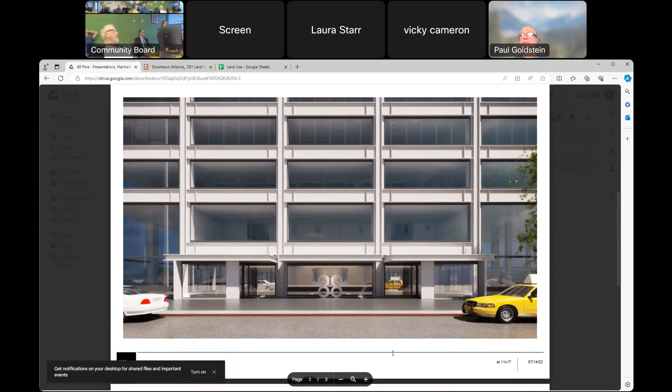I want to show you this that you asked for. So this is the existing condition outside, and then the proposed, with the two vestibules and the sliding doors. It may be helpful to talk through the plans for a moment—if you could switch to the file called existing. You want me to go through the third view? You can, if you like, but then let's go back to that too.

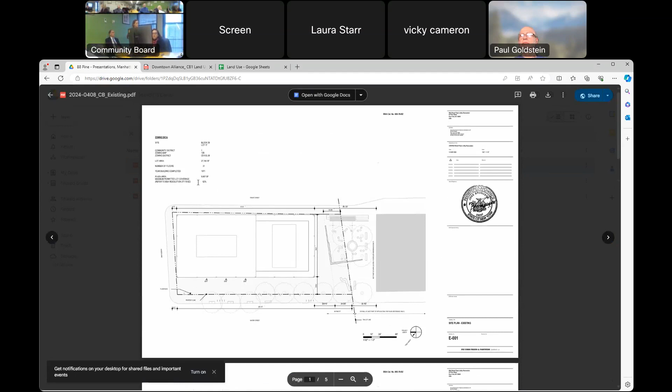Just for context, as you're pulling that up—I've worked in this building for 20 years. I've been with Pei Cobb Freed & Partners, and I just joined the partnership 9 months ago. This building's important to me professionally, but also personally, because I do work here.

So here's what's going on. This is the existing condition. You can see—next page, please. I'm sorry, one more after that.

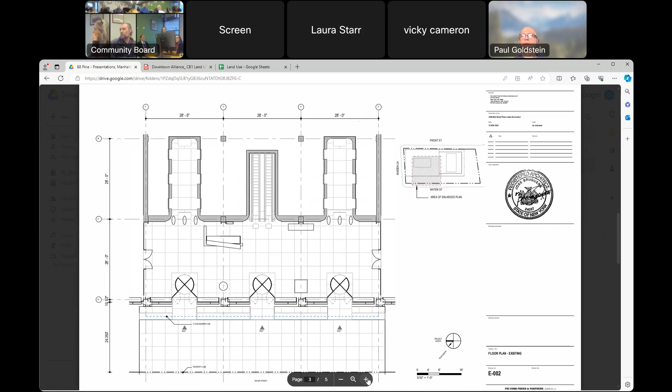So here's the existing lobby plan. You see there are 3 revolving doors and then the swinging doors, which don't have the required ADA compliant flat surface on the push and pull side of the door. Also, just as a tidbit, those 3 doors were there because, as you see in the center of the plan, there's an escalator. This was initially supposed to be an entry to the subway, which never got built. So that's part of why in 1971, before I was born, it was decided to put that many doors in.

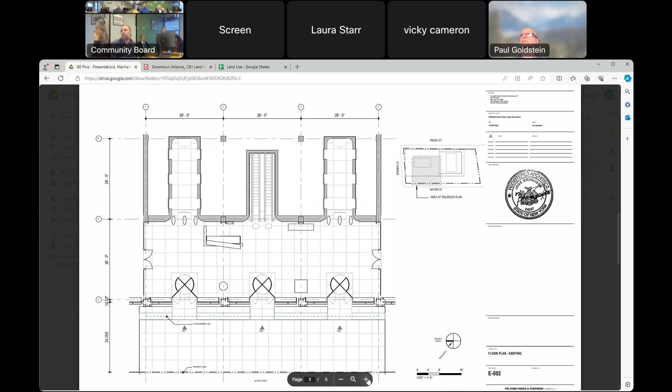So now if we switch to the proposed plan, please. Here we're adding these vestibules. So there are 2 things happening here. One is compliance with the 2020 New York City Energy Code.

This will be the 4th storefront renovation I'm doing in Manhattan under that new code. What happens is that code specifically eliminated the ability to provide swing doors adjacent to a revolver that don't have a vestibule—meaning you have to be able to open and close one door before you open and close the next. So it kind of took away that loophole in the energy code.

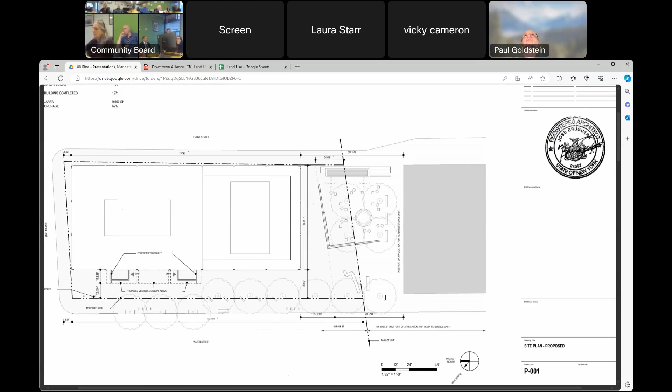So our solution here is actually to provide the sliding doors in a vestibule configuration, so there's one way of getting in regardless of your accessibility needs. This is what you're seeing in the plan. You can just go to the enlarged plan to see that. So that'll be ADA compliant and also energy code compliant, including all the bells and whistles for the glass thermal performance.

Of course, it's only a renovation of these couple of bays, but we are going to be compliant with that, and that's consistent with how everything's... I'm just slowly sliding through so the architects in the room can see.

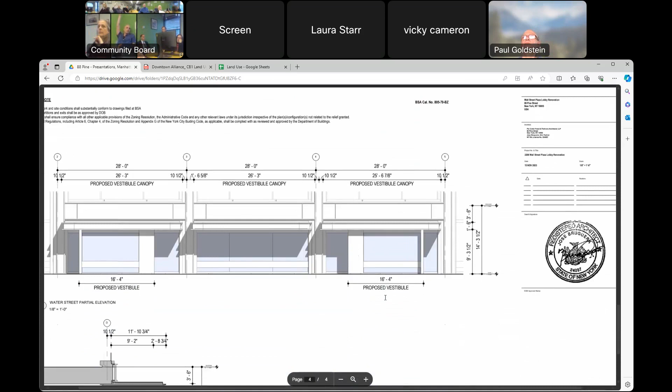Jason has his hand up. I am a big fan of Pei and this building—I live right by it. It's a shame it's not covered by some sort of preservation or whatever. I'm just gonna lead with this, might not be the same feeling for everybody, but I think it's as modest as you can make it, and I think it might be getting caught up in a lot of the Water Street text amendment vibes. Maybe, hopefully, we can find a solution if you really do need to provide access to this building, and that this is the only way.

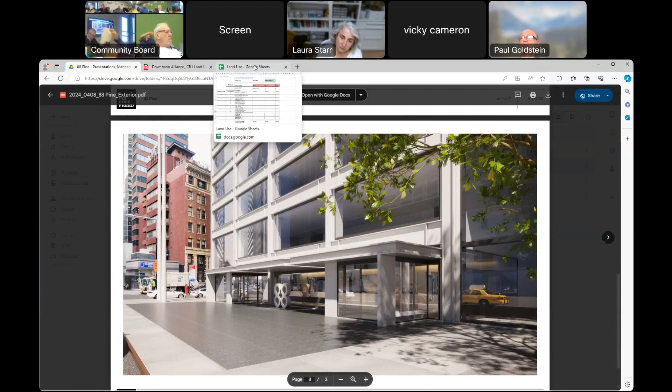Thanks, Jason. Alice, then Gerald, then Laura—I see your hand up online. Is the current existing condition illegal in New York City at this point for those types of doors, those 3 doors? Are they—illegal is not the correct word, non-compliant. Whereas it was legal when it was constructed, it remains legal to this day, but could not be constructed in this manner. Right, but it is legal today. So you can use those doors today.

So I just think that—the thing about this, I know this came up last time—it's understandable why this plan is being presented to us. You're taking over, I think, close to 400 square feet of city sidewalk. No, it's 12 by 16, that's close to—what is that—192 square feet times two, with two vestibules.

So I'm not sure how you get 12 by 16, it's 192, right? Times two is 384. So you're closer to 400 square feet of city sidewalk.

And I know that as of right, I guess, you're allowed to take that, we learned last time. You're creating basically a new advertising platform for 88. This comes out 12 feet from the building. That was city sidewalk, public sidewalk, that you're taking to put in the new 88, and I thought there was a sculpture or something involved.

And that's all, I guess, well and good for some people. It certainly isn't for me personally, and I agree with Jason on the integrity of the original building. But what I remember asking last time was about the space just to the north and south of you, that wonderful additional space that's part of your privately owned public space, which is not in great shape and doesn't have access from the building.

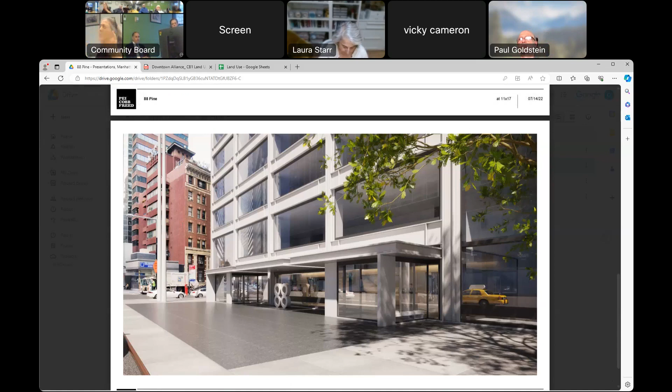I appreciate that, but if you're going to take 385 square feet of public space, you must give something back, and I'd maintain that an easy give-back would be to maintain and make that existing, very beautiful POPS into something the building benefits from. It would absolutely put it on the map. I don't understand why developers don't see that.

We will both go back to the client and tell them. Underline it. Yes, thank you. For sure. Okay, good. Thank you.

Definitely, though I will say, if we do make an entrance into the POPS, we'd have to take more space away for another vestibule. It's a design problem.

My point is that taking away 400 square feet of public space from the front of the building—I'm not saying to enter from the side, I'm saying make what you have on the side better, whether you... No argument there.

Okay, yes, it should be—if he's going to spend the money doing this, he should spend the money. And we shouldn't give it to you until you do that.

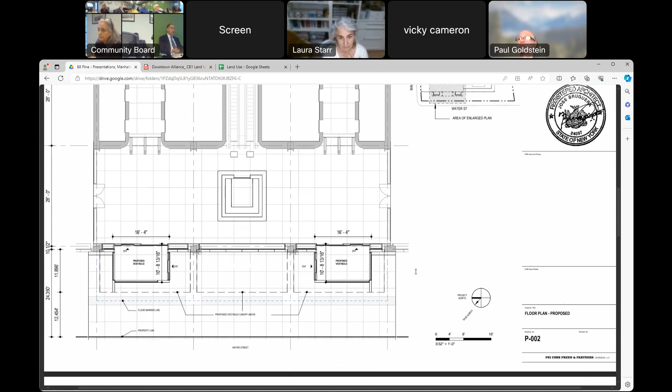This is not income-producing space. It's not going to increase the value since every tenant has to pay for the space. You pay only for your floor, including potential hallways - you don't pay for the lobby. So I don't see any economic benefit to having more wander space in the interior area.

Was there no way of bumping these vestibules on the inside of the lobby? We did study that - it was really a pinch point. It's a multi-tenant lobby, so people are moving around, and these two doors on the north and south of the lobby go into tenant space, so that's where people enter their offices. I can see that the pinch point would create really bad corners.

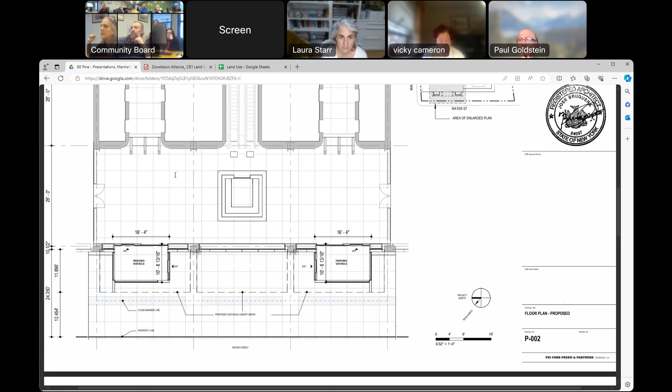What is the action here? What are we doing? It's a BSA application to amend the previously granted variance. In other words, we require more floor area - we're going back to amend the original approval to get additional floor area that exceeds the prior approved floor area.

Does it exceed the max FAR for the building - is the building overbuilt? For now, obviously yes. Well, that's a big ask - that's actually the most sacred ask of all, extra floor area. Can't you figure out how to carve it out of the thing? It's ridiculous, you can't ask for more floor area now.

What are we here for - is there a statement of findings? What is it, is it floor area, or is it just the bulk - we're out of bulk? It's out of bulk, correct. Yes, I spoke about it.

Hold on guys, so Laura, then Vicky, then Rose. I wanted to follow up on that floor area conversation, discussion.

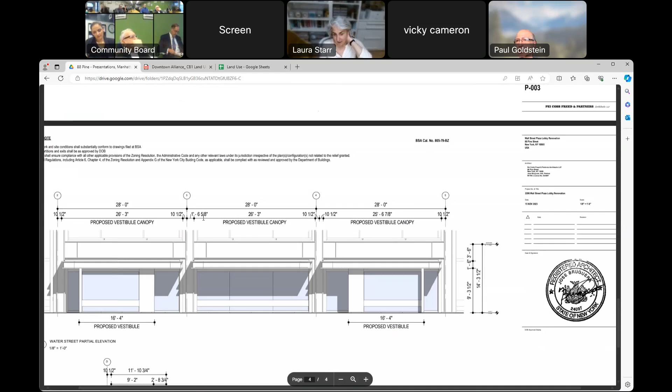Are you saying that an ADA access with the proper air seal vestibule will not fit in the footprint of the current entrances? By how many feet are we talking about? We've done other energy code compliant vestibules, and because of the dimension required between the doors, it would go further into the lobby.

Where, like how far off? I have to deal with stuff like this - you have a lot of architects in the room. What are we talking about here, how much more would you have had to intrude on the inside of the building to have this punch into the lobby instead of taking up the public space?

Can you pull up your existing condition, maybe? Well, if there's 300 and then these are 400, or rather 380 - but these are oversized, they don't need a 16-foot, 4-inch. It would be 82 feet inside that they would be taking extra, but that's not a lot.

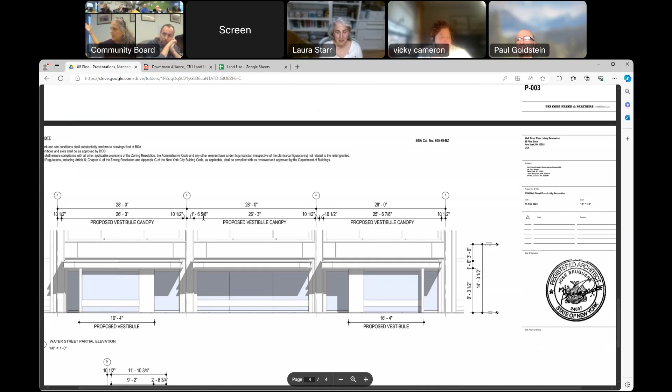Can't you swing the doors in or something? These are handicapped accessible conditions. This is what's a little misleading - those 3 doors are currently accessible, but there are in fact people who are handicapped in your building because it's a challenge to use those doors, as I've used probably those doors - yeah, it was very difficult.

Because there's not proper push-pull dimensions, so I had nowhere to stop to open the door. That's why. But okay, I guess I would like to see your studies of trying to get it to work within the current openings, even if it had to punch into the space a little more. Since you're trying to get more FAR, you should show us that.

That at least one of these doors can't be converted to what you're trying to do. That's the first thing. The second thing is, I actually find the architecture of the extension, maybe we could go back to that picture.

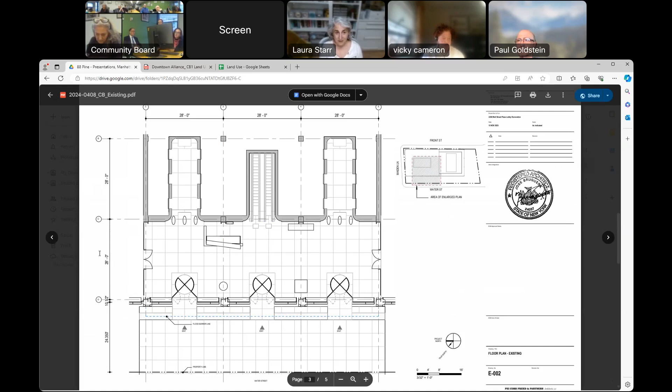I find it- I understand what you're trying to do. You're trying to use the white steel column framework of the building to punch out here. But the reason the building has those heavy frames is it's holding up a skyscraper. Here, it's just a little pavilion coming out. So it's heavy-handed for what you're trying to do.

Like I.M. Pei, what was great about his modern design there was that it was really expressing the structure that needed to be expressed to do the work it had to do. This doesn't have that work. So to me, it looks heavy and like it's kind of confusing the elegance of his building.

That's all I got. It's enough. Thank you. Thank you, Laura. Vicky, and then we'll come back into the room.

Thank you, Patrick. So Laura, well said. We are not sympathetic to this request. You got your bonus, and we don't want to give you more of our sidewalk.

In the end, it's a simple transaction. I will vote no if there are other options for ADA entrances. As an architect, design, there is always an option.

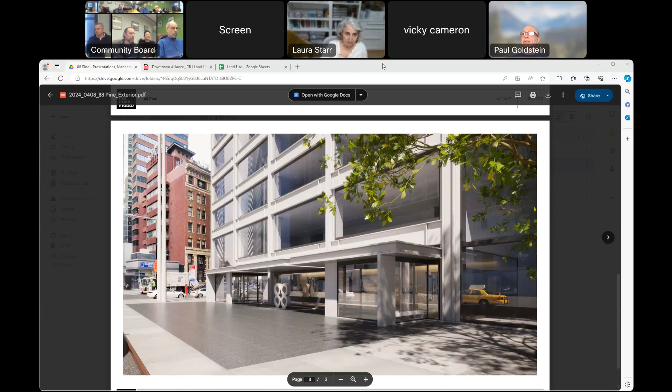and vaguely insulting to the community, because these public spaces, I know that maybe for the original designer, they're like leftover spaces, but to us in the community where we have so little open space, those spaces are actually incredibly precious to us. And to see them not well maintained, to see them just broken down and just left, and obviously nobody's putting in the effort to repair and to upkeep those, then to come and ask us for more private things while still not keeping up your end of the bargain on the public, I think you understand where we're coming from as a community.

Since I am new to this, relatively speaking. Bravo.

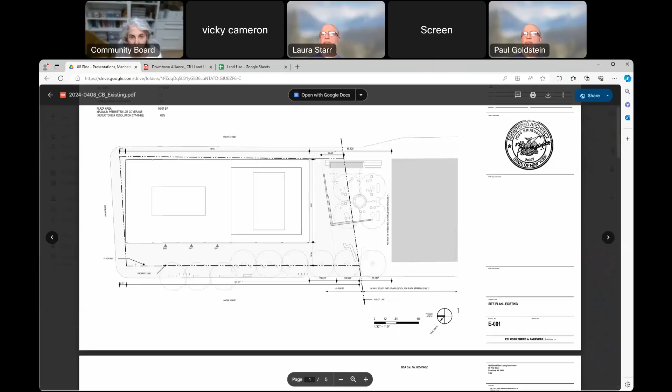No, it's more than a sofa. Is it where the FedEx is? Yeah, there's a FedEx there. Well, I know it because I live right by it - the water feature, full through the block. I know it. Okay, but this is what it looks like. There, there it is.

So our property is the building to the left - you see the dotted line, that is our zoning lot. The plaza is between the building we're talking about and the building to the right, shown on the blue map. So we share the plaza. But the current owner, those things are going to take out...

Are all those trees on Water Street that I see drawn - is that true, are those trees? Yeah. And they're there? Yep, they're wonderful.

Can I address the question of a community amenity, like there would be a trade? That was Laura, and then Laura has the last words, and then we should vote. I just had a question - is this Pei Cobb Freed's project? I missed that, you're with Pei Cobb Freed, right? So this is something your firm completely wants to see, like Sandi Pei is all about it, right?

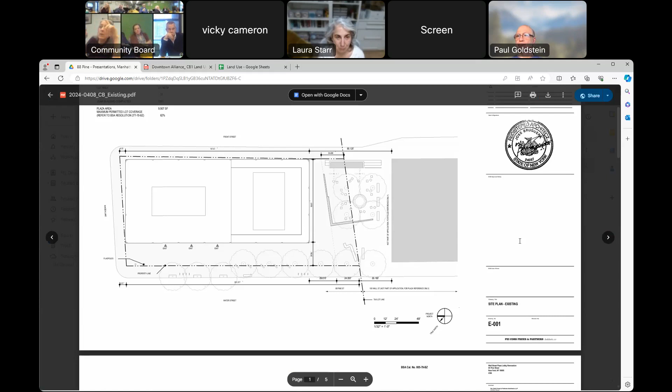He doesn't work there anymore, for a very long time. Oh, but okay. This building was actually designed by Joe McCready, who passed away. Well, okay, it's their firm, whatever. I just was curious. My partner, Jose Bruguera, designed the renovation - only in 1972.

Because I remember, during a history of looking at these POPS very carefully, that Sandi Pei did very much opine on this very plaza. I'll have to go back to my notes about it, but I was curious what his thoughts are on that. And I'd be curious what the masters of that period were saying as to what could or couldn't be done then in that very plaza.

I didn't realize it was a co-owned plaza. So your dilemma here is that your developer might be willing to do half, but the other developer wouldn't be willing to maintain or upgrade their half? Is that what you're saying?

I think it's a valid thing to bring that to the owner though, but it is, as John Ruth points out, a little bit messy. Laura, and then Joe.

To me, what the amenity for the community is, is the beautiful architecture of the building as it is now. So you're taking that away, and that's the problem I have. I think if we're going to ask for a trade of some improvement to open space, I wouldn't limit it to the plaza. I would ask for a donation to the park that Rose is creating, or to the Battery, or one of our other open spaces. I think we should think more broadly about it. Just to repeat, I think the building itself is the amenity and is the best architecture on Water Street. I agree, thank you, Laura.

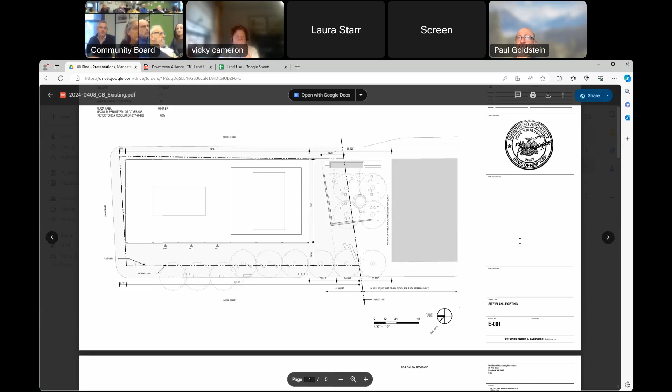Is there anyone who feels strongly another direction? Personally, I like it, I'm fine, but I'm the only voice I think. No, I'm more with you in terms of with conditions.

I'm not sure what the conditions are, yeah, we could fully articulate some. Benches and that'll be their condition. You've just heard from everybody pretty much that. And by the way, when I go back to the YouTube and review and put together our resolution, the wishes of the community will find their way into the whereas clauses.

Did anyone from the community sign up to speak? Not with a hand up.

However, for whatever reasons, and it's a laudable goal for why, we're really not getting anything from a building that's already, as you said, over bulk. So there should have been an incentive to work with, and I'm sure they'd want to beautify that area as well if they're gonna sell it. So it shouldn't have been an impediment to getting something done. It should actually be a benefit.

We're not saying it's an impediment, we're just raising the occupancy, that's all. And again, we can do what we can do on our side. If we can't work with them, we can't work with them, and we'll have to work on half the plaza.

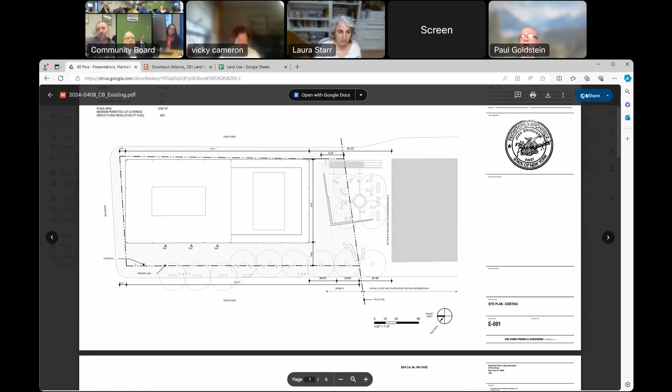So is this setting up... I've heard where we are as a committee for the most part, but is this setting up a precedent for that other building, the neighboring building that is possibly for sale? No, every application is different because the circumstances are unique.

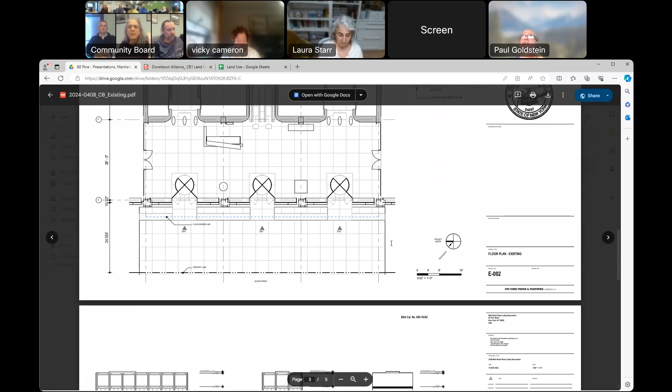It's one more architectural question, since we have the architects in the room. You're coming out 12 feet from that building. You certainly don't need 12 feet to put it in. It's 10'8". Oh, I thought it was 12, but 11'9", I thought it said, but whatever.

There's no access from above? So this is like an awning, right? You cannot step onto this, correct? And in fact, we've gone through great lengths to make it very... so it doesn't violate that.

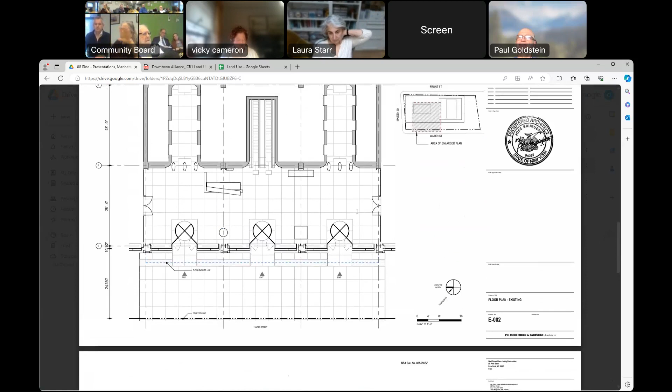And there was something about a sculpture somewhere. Is the 88 the new sculpture? I thought I read somewhere that there's a new sculpture. Is that the sculpture being referred to? So to Rose's point, she's absolutely right, that now you are taking over sidewalk and putting in a new sculpture, which arguably, the number 88, the address of your property, I would argue is not an artistic sculpture, but is in fact the number of your building.

So this is an advertising moment, and I would only say, I just really feel strongly that this point of why something gets done - this is not about accessibility, this is about a new entry to your building, and that is what you're asking us to evaluate. So to throw in accessibility as a way to say that's why we're doing it is really not completely honest, and that's something I just want to say. Well said, Alice, it's honest, it's just a perspective.

Okay, sorry, Rosa, can you be really quick? Yes. I would just love it if in our resolution, no matter which way it goes, that we state we are 100% in support of making it more energy efficient and accessible, especially the accessible part, and that we are fully confident that no matter which way you do it, whether interior or exterior, you as a firm are fully capable of doing it in the best possible way.

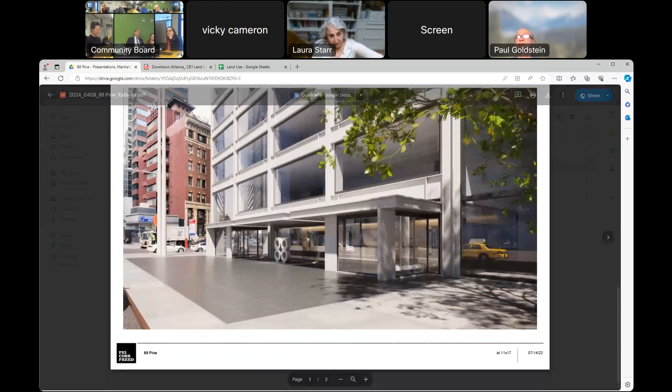When you're doing the mechanisms for the map, you only gave us two entrances and exits, but in reality, if the 88 is there, you're talking about like 10 square feet. Is the canopy permitted? The difference is a 0.06 differential in the floor area, or 0.0006 in terms of the entire building. They have over 500,000 square feet of space in the building.

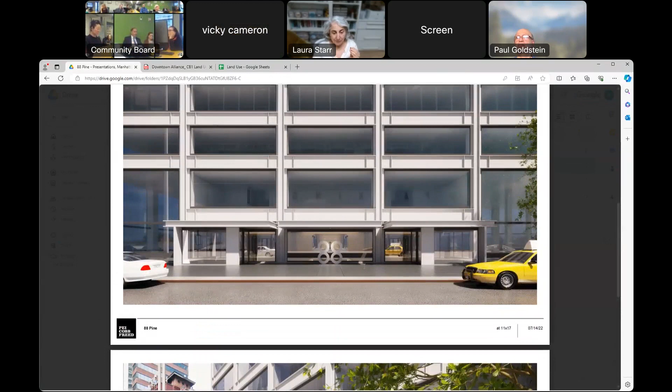Can we do the architectural stuff another time? We've got to vote, we gotta move on. Let's go. The Committee's a no.

It's going to be a negative resolution with all the whereases we just discussed. I'll call the vote. We can do this by acclamation.

We'll assume you're a yes on the negative resolution, which means you're in disfavor of the plan, unless you unmute or tell me now. I'm a no on the resolution. Wait a minute. You're misunderstanding, I think. It's a negative resolution, so the resolution says no to the exterior. A yes is a vote against it, a no is a vote in favor of it. Oh, that changed my mind. But okay, whatever, sorry again, it's a bit of a twister, right?

I got it, I'm not supporting this, so you're a yes on the resolution. I understand your vote. Is there any abstention? I apologize, thank you. I'm a yes on the resolution.

The motion passes, which is a negative resolution. But we didn't review what's in the resolution, so I want to make sure we picked up all the points about the maintenance of the park, the idea that 88 is considered a public sculpture. A lot of these points raised are all going in the resolution in the whereas clauses, because I'm voting with that understanding to show what we've talked about tonight.

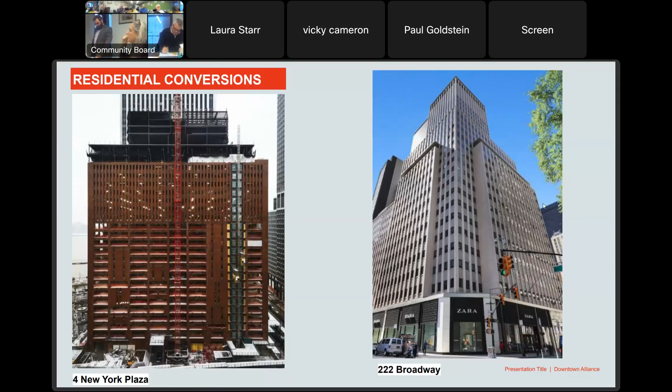I'm sure some of you read some of the big name openings, the Metropolis at the Performing Arts Center, Sixpoint new brew pub at Brookfield Place. Poets House reopened, which we're very excited to see in Battery Park City, a great neighborhood institution. Mercer Labs, the Museum of Art and Technology, at the old Century 21 Bank building, which is an interesting experience. I understand they're doing fairly well there, and it's an interesting use for the building.

We also saw Court 16 open at 20 Liberty, and the Open Squash at 100 Pearl Street, which I want to add because I think those are important indicators of where the retail market in Lower Manhattan could be going in the future, as developers and property owners start to think creatively about how to use some of the more difficult to lease spaces. These would have been obvious candidates for a big credit tenant like a Duane Reade or CVS pre-COVID, and those tenants aren't really in the market looking to expand right now. So thinking about creative uses like Open Squash or Court 16 that serve both an office population and the residential community downtown.

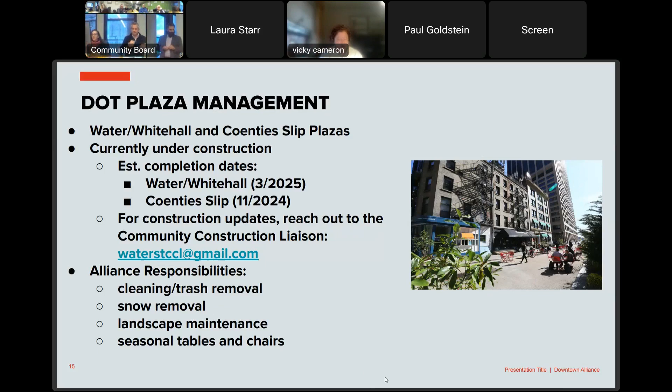All right, I know we've been asking questions throughout, but questions for Josh or Tony? Is this the last? I have a question, I have my hand raised up. Sorry, Vicky, I lost my - it's okay, I'll wait my turn. Right, there you go, Vicky.

Thank you, Tammy. Thank you, Patrick. I want to make a couple of comments and a couple of notes. On quality of life: one thing we learned over the last 3 or 4 years with COVID is that 40 to 60 hours a week in an office, totally away from our homes and our families and our pets, might not be the best way to live life. So while I understand that commercial rents are an issue, I'm not willing to be a sacrifice for that. I think maybe we should all think about a different typology. There are different options; conditions make us move forward. I would like to make that a comment to our board and to you.

Second of all, the market rate apartments - I'm not going to comment on commercial rents, but I will say that downtown Manhattan has become absolutely unaffordable to average professionals, single professionals, let alone professionals with families. Rents are out of control, and almost everything we get today is at market rate, which requires a single professional to make more than $160,000 a year. That is not doable. I am extremely concerned about what has happened to Fulton Subway Station with Westfield leaving us.